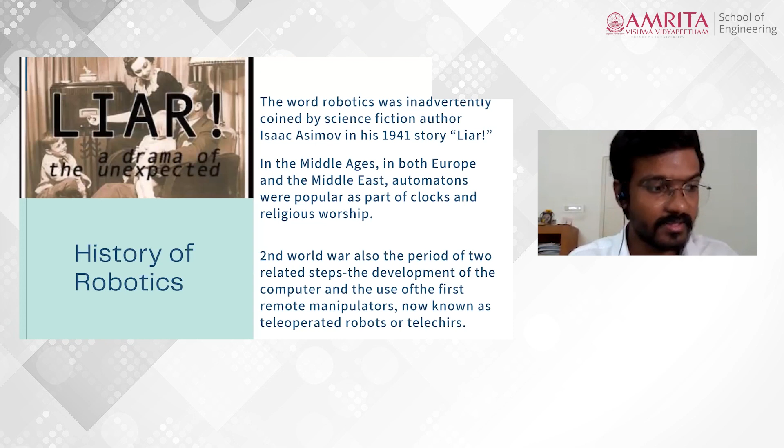There have been lots of movies and books which have described robots at various levels. Some have described and shown simple bots, mechanical humans, humanoids, cyborgs, simple robot toys and assistant robots, etc. So what is actually a good robot?

We need to think about it, because for good understanding we should look back at how robotics was discovered and how the growth and development happened. One must always look at the history and understand the evolution to move forward in robotics, not only in robotics but in every subject.

The word robotics was inadvertently coined by the science fiction author Isaac Asimov in the year 1941 in one of his sci-fi fictitious stories called Liar. I have provided a picture over here, and I have read this book also. It is available on the internet for free, and I would really suggest you read it, because how this robotics idea came up for him is something very adventurous.

The ancient Greeks and Romans developed simple automatons and used them as tools and toys, and they also included them as part of religious ceremonies. There have been many movies about this also, and you can Google it.

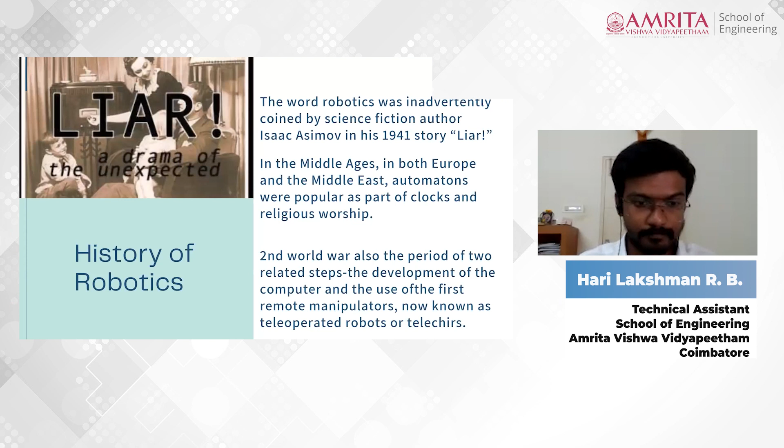Here is the image where you could see in the left first part, in World War II, Germans used teleoperated robots for bombing the US soldiers. And this is the image depicting soldiers viewing a new robot for the first time.

As I said earlier, it's totally up to our hands whether we are going to use robots for good deeds or not. So, anyhow, let's continue the history part, because I need to mention from the 20th century till today, the robots have been under a great extent of evolution.

In mid 1950s, the German firm KUKA developed an automated welding line for appliances as well as a multi-spot welding line for Volkswagen company. Here is an image of the KUKA robot used for multi-spot welding, implemented for Volkswagen, the famous car company. The image is below on the left.

By 1968, Kawasaki had licensed a Unimation design of hydraulic robot and had begun to build them. In 1969, General Motors had achieved 90% of the body welds using Unimates in one of its plants. I'm sorry I could not provide you the Unimate picture of how it looks. So kindly note it down, and you can Google it to get the image.

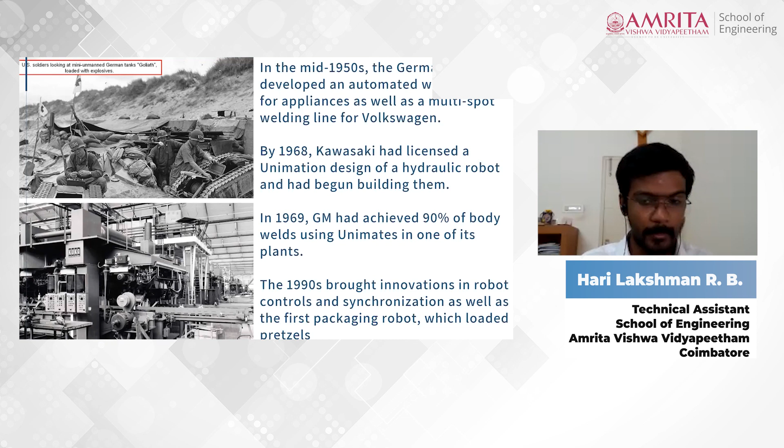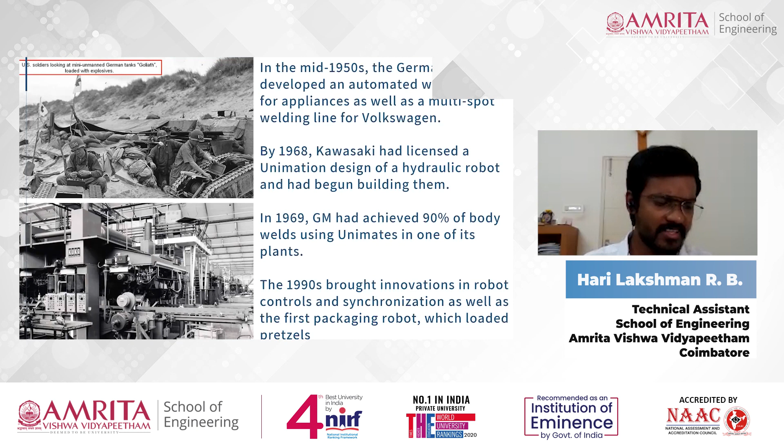So in 1970s, Stanford University developed the so-called Stanford robotic arm, as it is still known today, used for many small parts assembling and incorporating touch and pressure feedback.

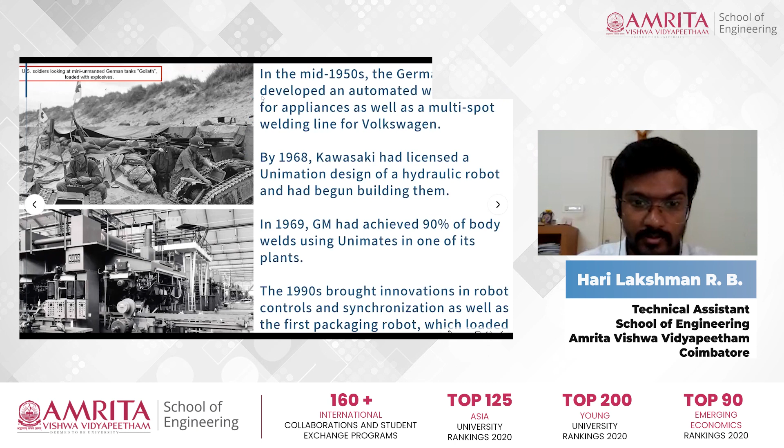Okay, just a second, I got a message. So for me, the history of robotics is only visible, and we are still in the part of history of robotics. I hope I did not change the slide yet. Okay, let me change the slide.

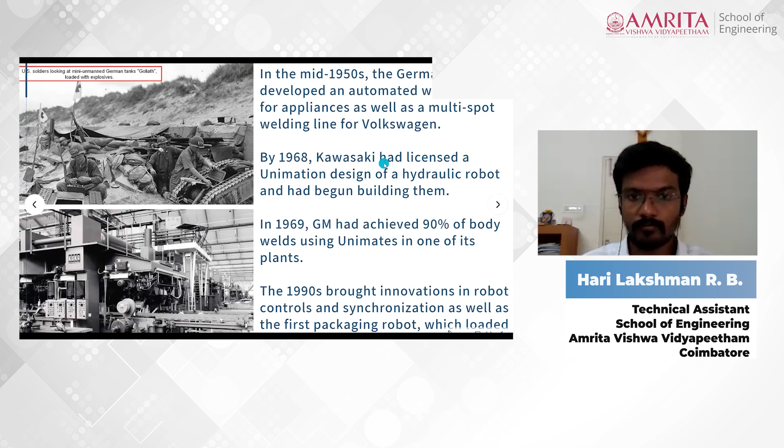The year 2013 saw the introduction of collaborative robots, or so-called cobots. Please do note down what cobots are, it is something important, and that's the next stage of robotics, and we'll soon be using it at our work site alongside human workers.

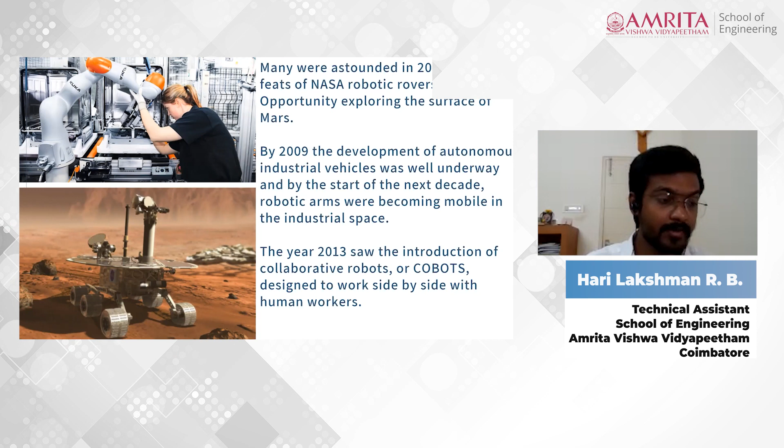So over the last half century, robots have found a place in other spheres. They are used as toys, entertainment, even military weapons, search and rescue assistance, and many other jobs. Essentially, as programming and technology improve, robots find their way into jobs that in the past have been too dangerous, dull, or impossible for humans to achieve. But now it's becoming possible, and robots are available.

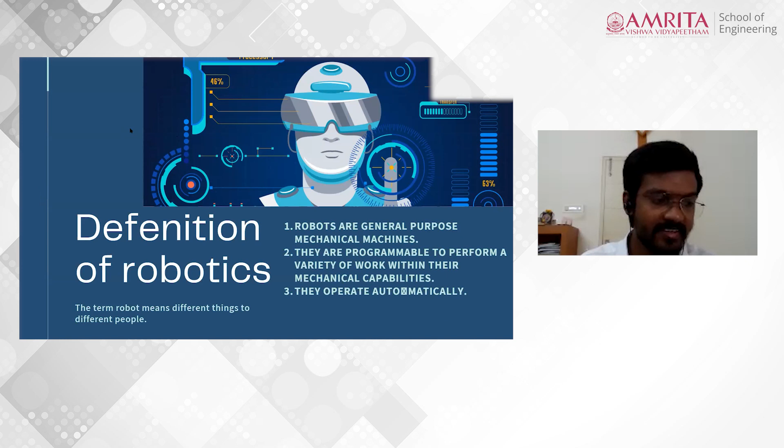Several difficulties are inherent in many of these robot definitions. In the opinion of many individuals in the field, all current definitions of robots are too restrictive. The definitions may have been satisfactory when they were adopted, but they had no provision to incorporate changes in technology or application that developed, and thus the definition is now generally considered out of date. As of now, there is no good or final definition for what a robot is.

So the ISO and RIA, please do note it down. ISO is International Standard Organization and RIA is Robotic Industries Association. These two associations, along with others, recognize this as a problem, and they've been attempting to develop a more up-to-date definition for a robot.

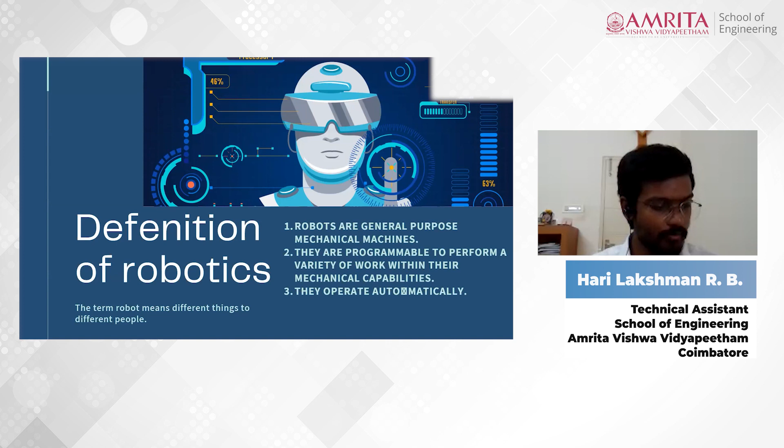The term robot means different things to different people. Current definitions are reactive to past technology and do not address the issues of the robot of tomorrow. In simpler terms, the definition of robot changes from time to time. It is not something universal until now. So each major robot association in the world has its own definition of industrial robot and general robot, and although similar, there are sufficient differences to cause confusion over what should be called a robot for statistical purposes.

These are a few definitions given by the Oxford English Dictionary. They give the following definition: a machine which is capable of carrying out a complex series of actions automatically, especially one programmable by a computer. This definition includes some interesting elements too.

Carrying out actions automatically is a key element in robotics, but also in many simpler machines called automata. The difference between a robot and a simple automaton like a dishwasher is in the definition of what a complex series of actions it can do. So think yourself, is washing clothes composed of a complex series of actions or not? Can we call a washing machine a robot or not?

Is flying a plane on autopilot mode a complex action? Can we call it a robot or not? And is cooking bread by a toaster - it automatically toasts bread - can we call it a robot? We can't. So for all these tasks, there are machines that are at the boundary between automata and robots.

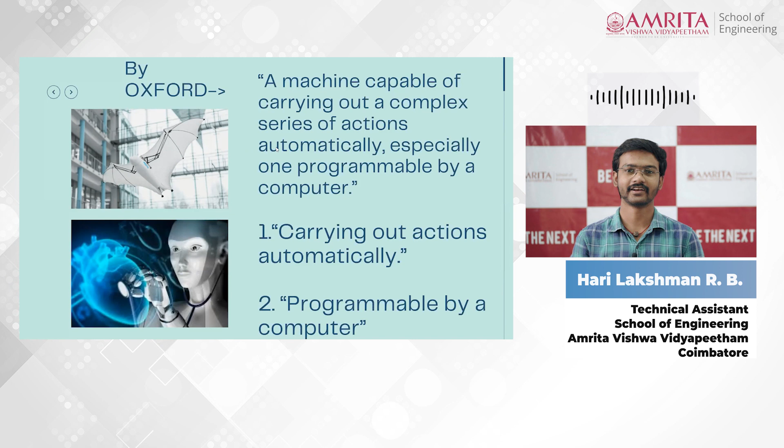A crucial element of robots that is not mentioned explicitly in the definition is the use of sensors. Most automata do not have sensors and cannot adapt their actions to the environment. Sensors are what enable a robot to carry out complex tasks.

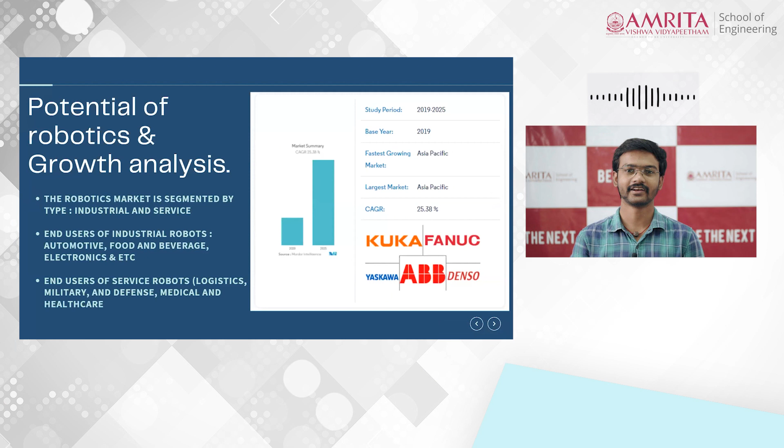It is actually always difficult to provide accurate figures to track the growth of robotics industries. For example, some sources do not distinguish between robots built and robots sold, how many robots are being shipped, and how many are actually installed and in working condition. In addition, since the definition of robots and the types of statistics reported change between countries, information gathered from national organizations like ISO, RIA, and others cannot easily be compared.

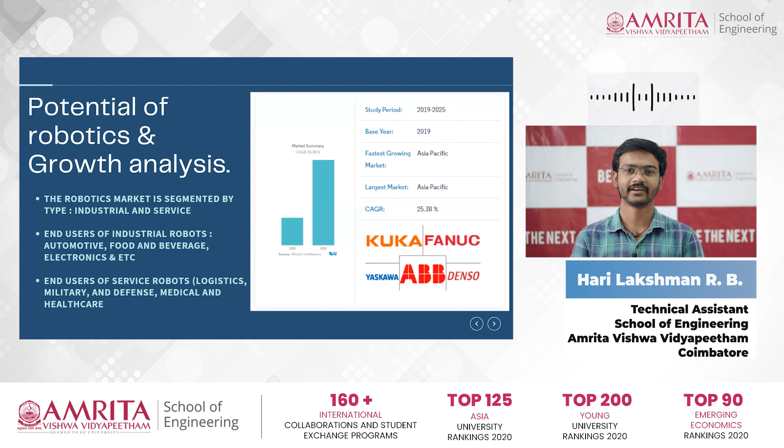They could not get the exact details, though we have provided a few analyses which could be helpful, because some country organizations have corrected earlier released figures, and these corrections have not always been picked up in the literature. The robotics market is segmented by types - industrial and service types. The end users of industrial robots are automotive sectors, food and beverage companies, electronic companies, and others.

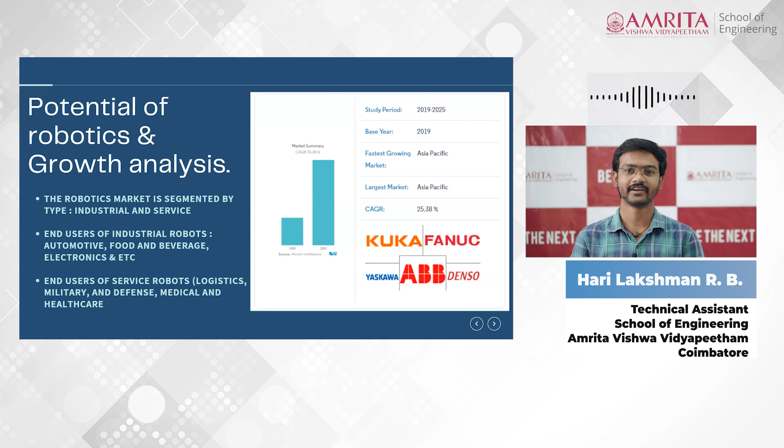And the end user services of robots, service robots, are used in logistics, military exercises and defense purposes, in the medical sector, healthcare, and so on.

The global market for robotics is expected to grow at a compound annual growth rate, CAGR, of around 25%, reaching just under 210 billion US dollars by 2025. This is really a big number to be mentioned.

The industrial robotics market, which has traditionally represented the robotics industry, has been led by Japanese and European robot manufacturers. They're giving way to non-industrial robots such as personal assistants, customer service robots, autonomous vehicles, and UAVs, meaning drones. The automotive industry, considered the most critical application sector of industrial robots, has significantly increased investment in industrial robots worldwide.

As I mentioned about the history, Volkswagen was the first company to implement KUKA robots. By today, as of April 2020, BMW AG has signed an agreement with KUKA Robotics for the supply of around 5,000 robots destined for new production lines and factories around the world. There are many advantages of implementing robots in factories and industries, which I'll talk about in later sessions.

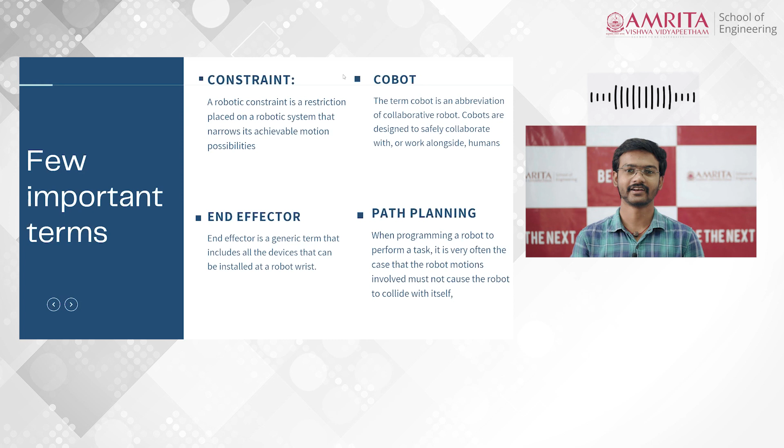So, constraint - what is a constraint? A robotic constraint is a restriction placed on a robotic system that narrows its achievable motion possibilities. Constraints can include mechanical constraints of the whole system, such as joints with their limits, and constraints applied by users, such as the desired position of the tool or the desired position where the robot should or should not move.

The next important term is cobot. The term cobot is an abbreviation of collaborative robot. I've already mentioned cobots in the history section - this is one of the important terms we should know. Through the addition of more sensors, a robot that was not originally designed to work with humans can enable collaborative operation in a manufacturing environment, because we can't give everything to a robot. By co-working with a robot, we can implement much more than before.

The third term would be the end effector, also known as end of arm tooling, EOAT. The end effector is a generic term that includes all devices that can be installed at the robot wrist - the subsystem of the robotic system that links the manipulator to the part being handled or worked on, giving the robot the ability to pick up, handle, or otherwise interact with parts in the environment. A few examples of end effectors are grippers and welding torches, etc.

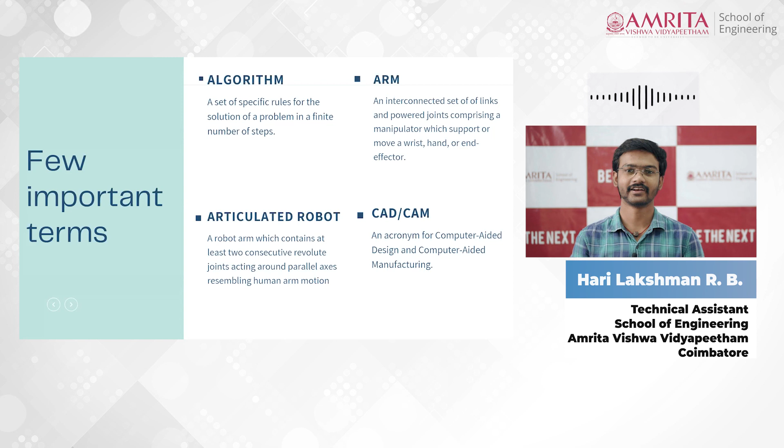Now what is CAD and CAM? Mechanical students could definitely understand this—it's an acronym for computer aided design and computer aided manufacturing. CAD is a designing process, where mechanical engineers design any kind of robotic part or joint with the help of computer software.

CV, also known as computer vision or machine vision, is the use of computers or other electronic hardware to acquire, interpret, and process visual information. It is nothing but a camera—a camera is a simple example of computer vision.

Next is DOF, which is degree of freedom. Whoever is learning robotics must understand what degree of freedom is all about. It is nothing but the number of independent ways the end effector can move, defined by the number of rotational or translational axes through which motion can be obtained—the two different types of motion that can be acquired by any object in the three-dimensional world.

Imagine your whole arm: you can move translationally, straight forward and back, or up and down, and rotationally, you can rotate your wrist or your fingers. These are the different types of motion you can do with your hands, and the same goes for a robot's end effector, or any part. So degree of freedom is the number of independent ways any object can move. In the third session on mechanisms of robotics, I'll explain this clearly.

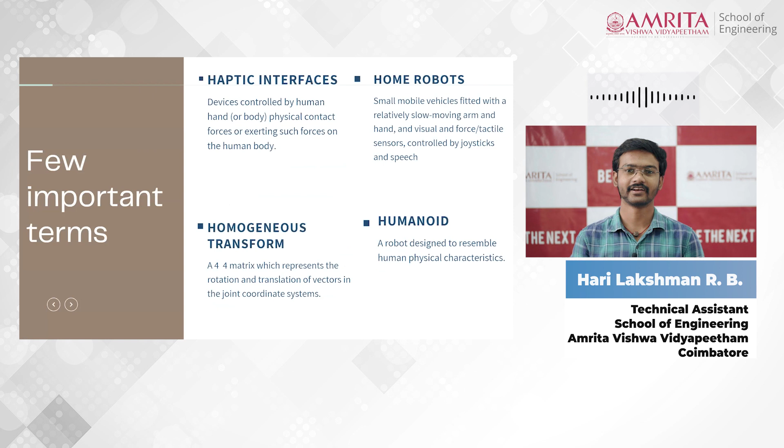Haptic interfaces are devices controlled by a human through physical contact. We exert some force from a human body, which is interpreted by the robot, and it moves according to the command given through that action using force.

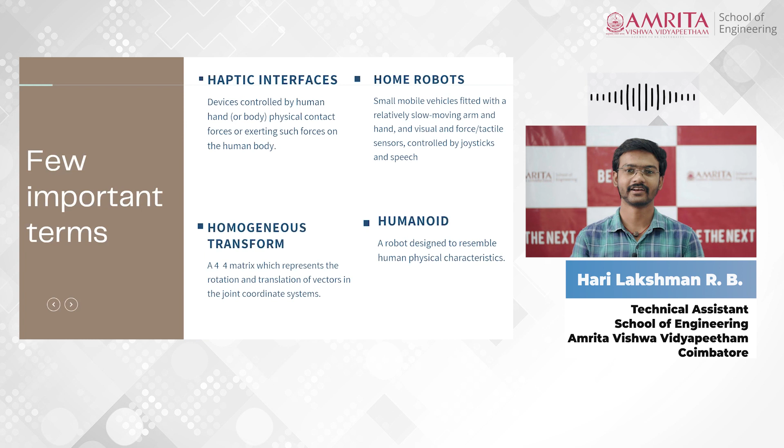Homogeneous transforms are also important, because while doing the kinematics and design of robots, homogeneous transform plays a vital role. It's a topic that comes under matrices, so you can learn it in the math part.

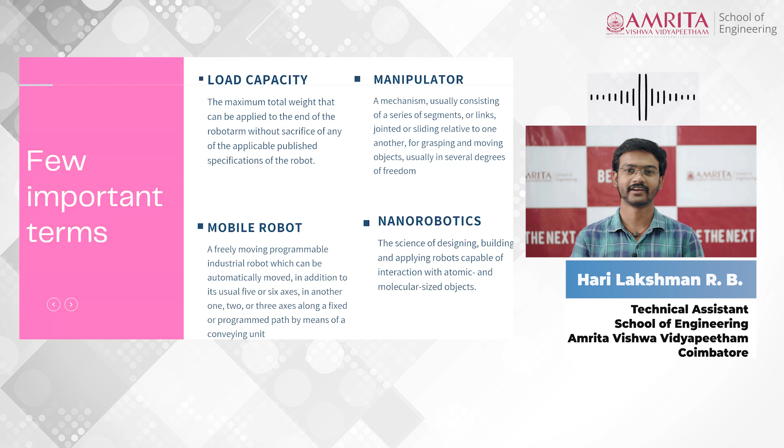Manipulators are one of the important terms we need to understand. A manipulator is a mechanism usually consisting of a series of segments—links, joints, or sliding parts—relative to one another for grasping or moving objects. It usually has several degrees of freedom. A manipulator is nothing but a robot, but without artificial intelligence built into it.